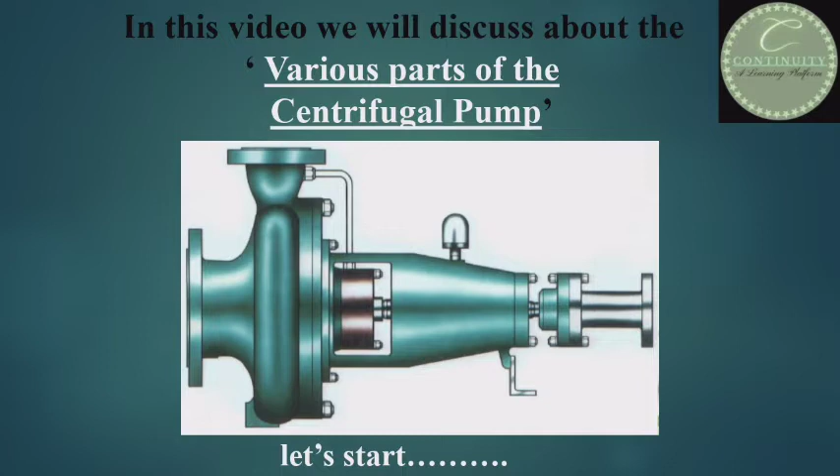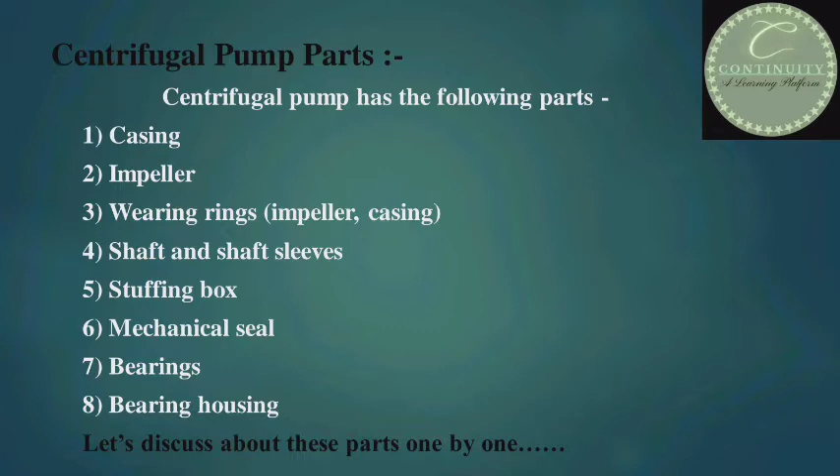Let's start. There are various parts of the centrifugal pump, like casing, impeller wear ring, casing wear ring, shaft sleeve, stuffing box, mechanical seal, bearing and bearing housing. Let's discuss these parts one by one.

At first I shall discuss the pump casing. That is, what is casing? What are its types? And of which material is it made? Let's start one by one. What is casing? Casing is a stationary part of the pump that converts kinetic energy of the liquid into pressure energy and directs it out from the pump through the discharge point.

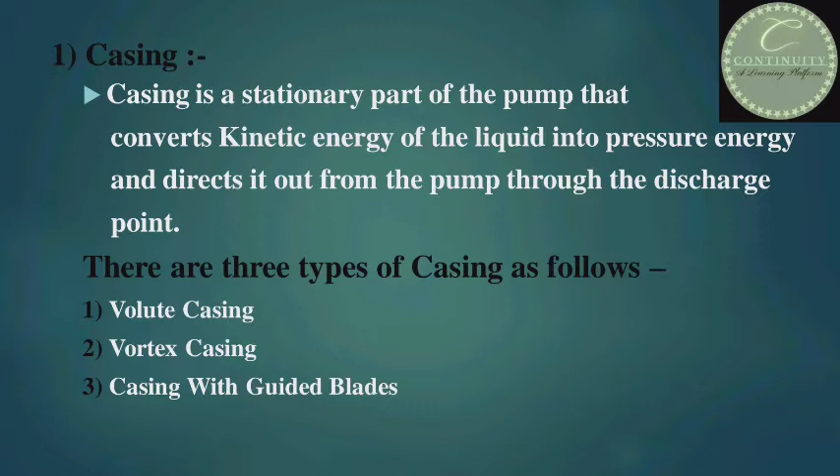Now, how many types of casing? There are 3 types of casing. First, volute casing, second, vortex casing, and third, casing with guide blades. Let's discuss the volute casing. It is a spiral type in which the area of flow increases gradually. The increase in area of flow decreases the velocity of flow. Decrease in velocity increases pressure of liquid flowing through the casing. Volute casing is the most common type of casing.

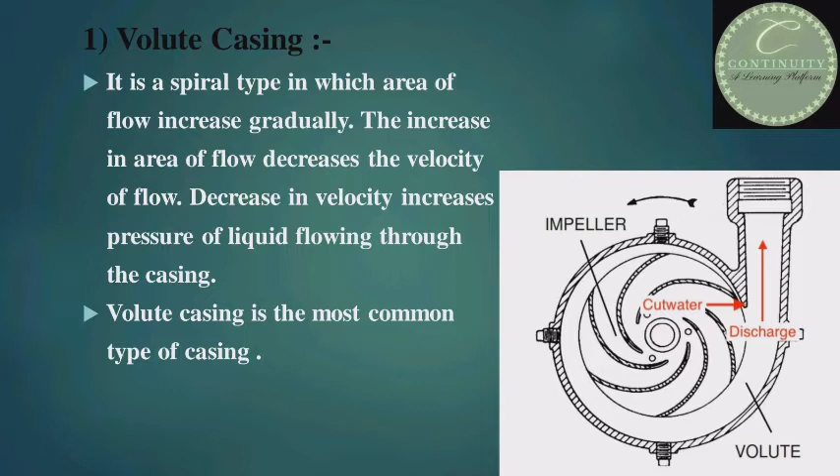Look at the diagram. This is a volute casing. The impeller is placed within the volute. The impeller is positioned in such a way that the outer diameter of the impeller is closest to the volute at the point just past the discharge. This point where the impeller is closest to the volute is called the cutwater.

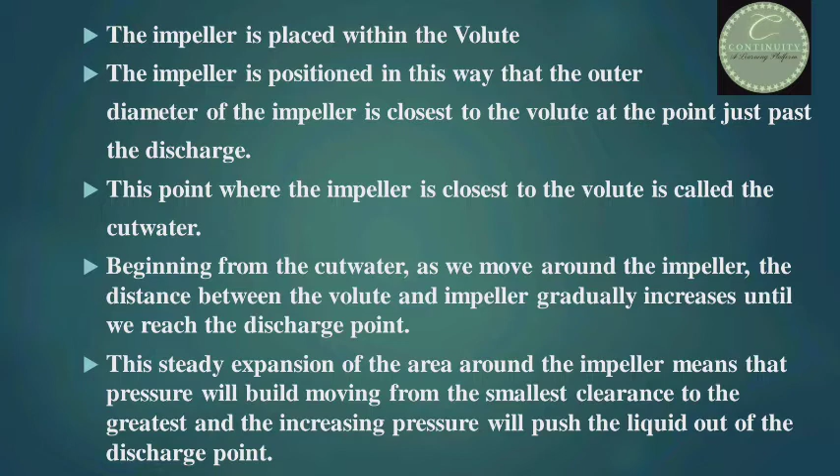Beginning from the cutwater, as we move around the impeller, the distance between the volute and impeller gradually increases until we reach the discharge point. This steady expansion of the area around the impeller means that pressure will build moving from the smallest clearance to the greatest, and the increasing pressure will push the liquid out of the discharge point.

Now, second, vortex casing. Vortex casing is a casing in which a circular chamber is provided between the casing and the impeller. Vortex casing is helpful to increase pump efficiency by reducing eddy formation to a considerable extent. Look at the diagram. This shows the vortex casing.

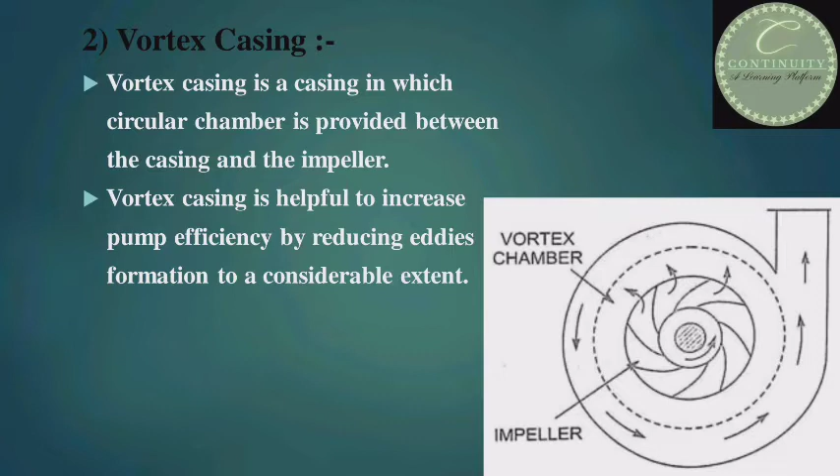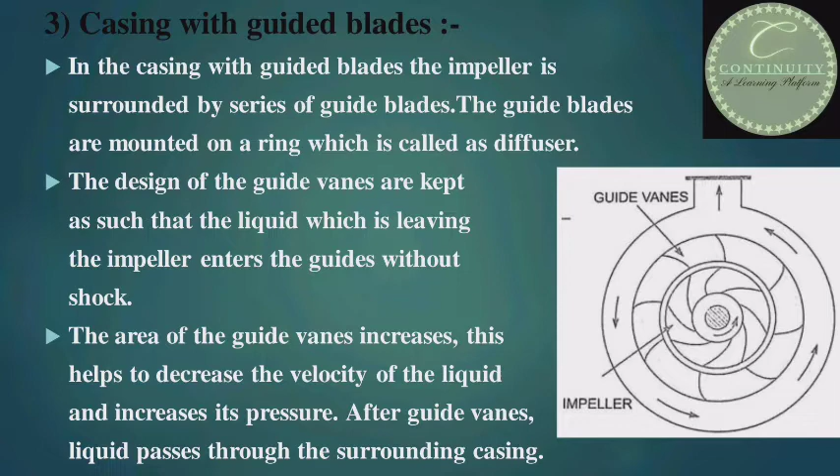Now third, casing with guide blades. In the casing with guide blades, the impeller is surrounded by a series of guide blades. The guide blades are mounted on a ring which is called the diffuser. The design of the guide vanes is such that the liquid leaving the impeller enters the guides without shock. The area of the guide vanes increases. This helps to decrease the velocity of the liquid and increases its pressure. After the guide vanes, liquid passes through the surrounding casing.

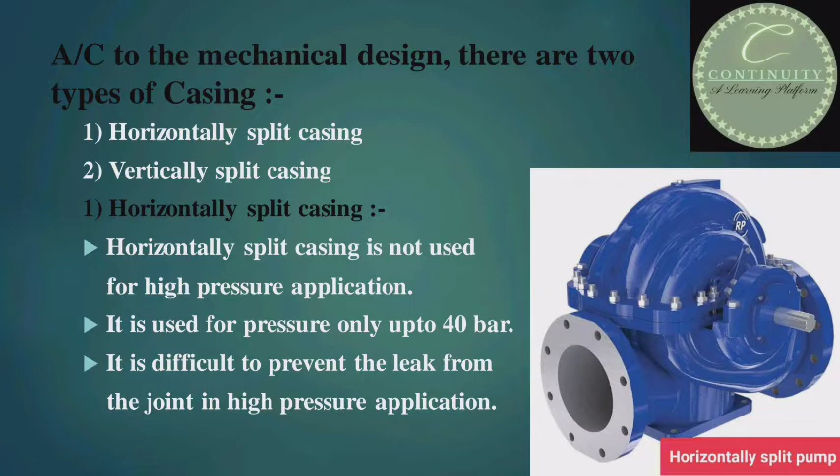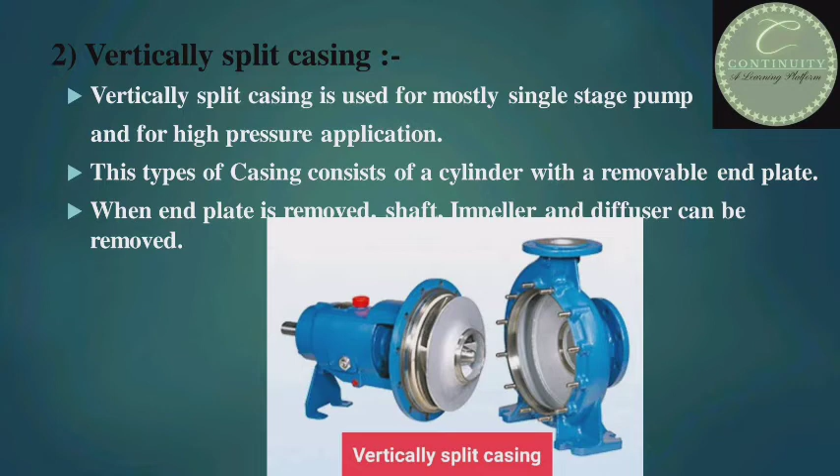Second, vertically split casing. Vertically split casing is used mostly for single stage pumps and for high pressure applications. This type of casing consists of a cylinder with a removable end plate. When the end plate is removed, the shaft, impeller and diffuser can be removed. You can look at the diagram. This is vertically split casing, which is divided into 2 parts vertically.

Now, selection of material for casing. The following criteria should be considered in the selection of the material for casing or impeller. First, corrosion resistance. Second, abrasive wear resistance. Third, cavitation resistance. Fourth, strength. Fifth, casting and machining properties. Sixth, cost. Casing can be made of stainless steel and alloy steel, depending upon the pressure, temperature and corrosive nature of the liquid. I stop this session now.

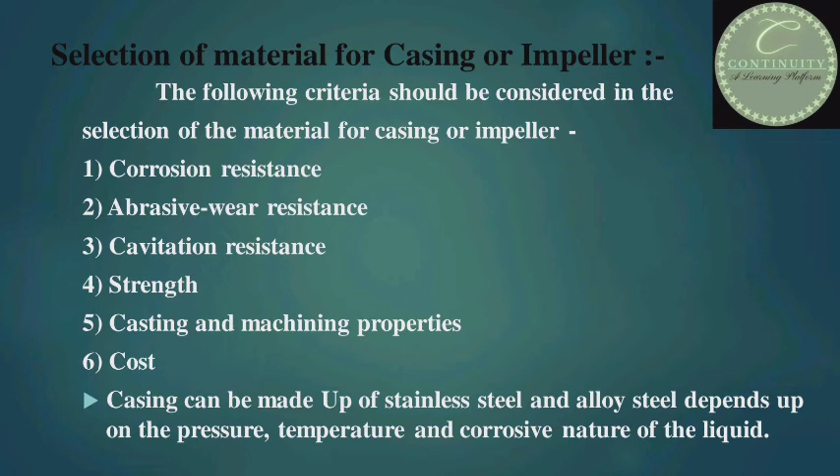I shall discuss the next parts in the next video.